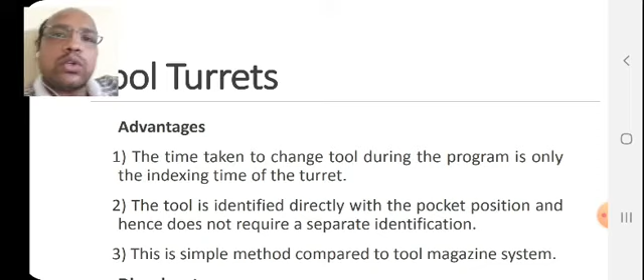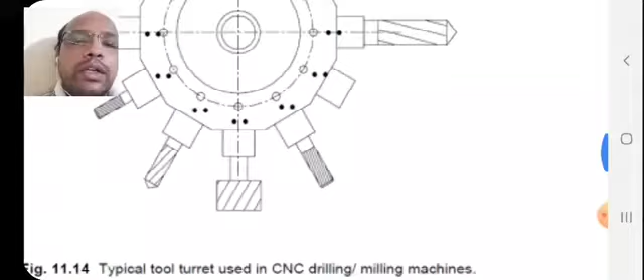Suppose the turret is rotated by 30 degrees. You can see this diagram once again. Suppose in this diagram, from this tool you want to shift to this tool, so there is approximately an angle of 30 degrees. So for 30 degree rotation of the tool turret, you need some time. That time is called indexing time.

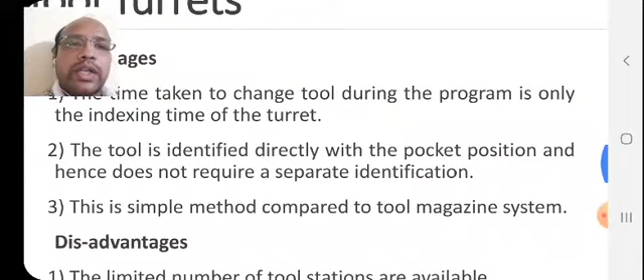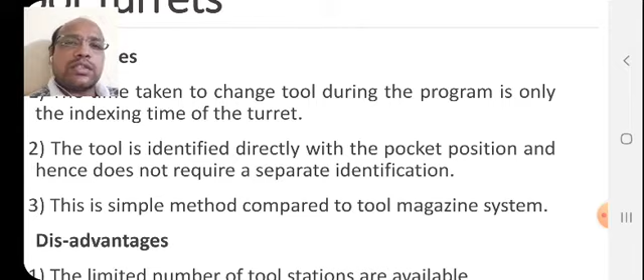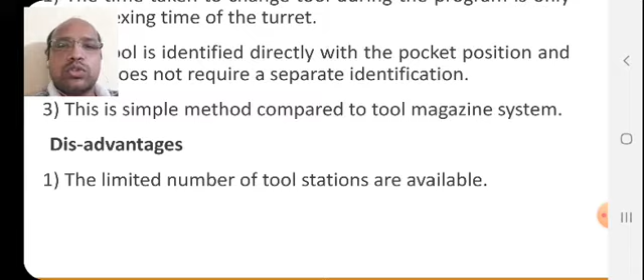Now let us see the next advantage. Tool is identified directly with the pocket position, and hence it does not require separate identification. Or you can say simply we have defined the tool number in the part program, so you don't need to identify the tool itself. This is a simple method compared to tool magazine system. Tool magazine system consists of a large number of tools, but tool turret consists of a minimum number of tools. Disadvantage is that only a limited number of tool stations are available in tool turrets.

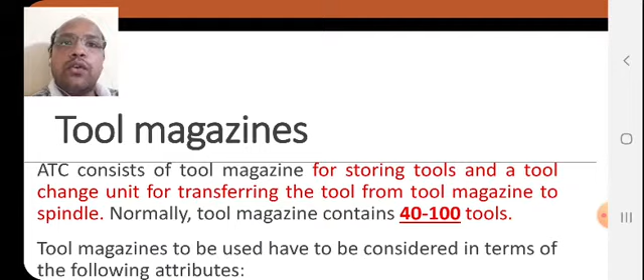Now let us see what is a tool magazine. Automatic tool changer (ATC) consists of a tool magazine for storing tools and a tool change unit for transferring a tool from the tool magazine to the spindle. So we have to transfer the tool from the tool magazine to the spindle. In this way, the tool change procedure will happen. Normally, a tool magazine consists of 40 to 100 tools, so a large capacity is there to hold the tools.

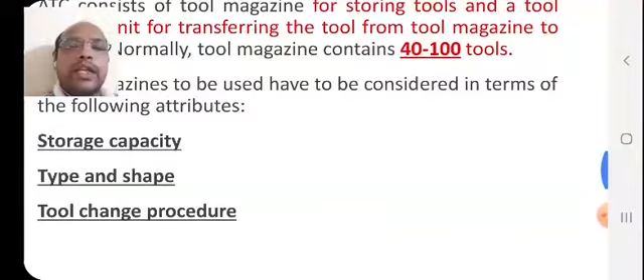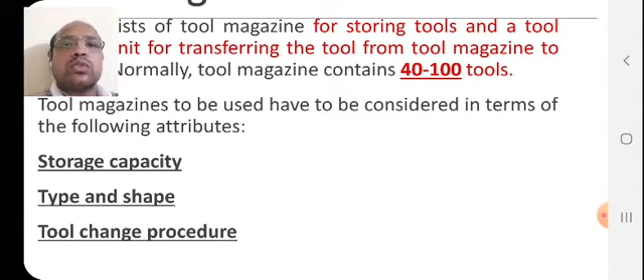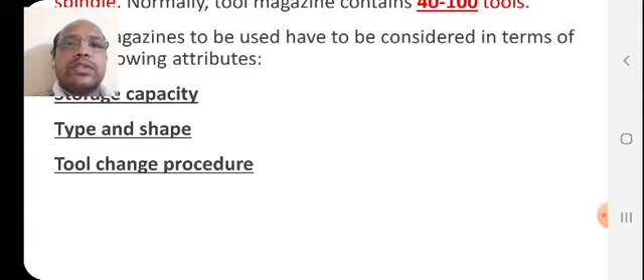Tool magazines to be used have to be considered in terms of the following attributes: storage capacity of the tool magazine, type and shape of the tool magazine, and tool change procedure of the tool magazine. These three parameters are important to consider the tool magazine quality or features: storage capacity, type and shape, and tool change procedure.

Now, the advantage of a tool magazine is that a tool subjected to excessive wear can be duplicated, so that when a tool has reached the end of its life, another tool is ready for operation. This is a great advantage of the tool magazine. Once tool life is about to be over, you can shift to the next tool immediately.

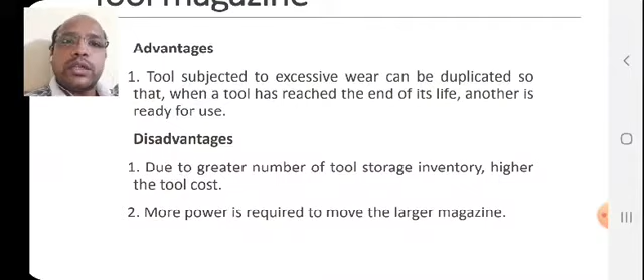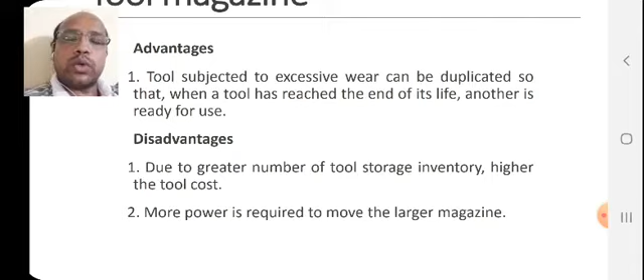Disadvantage is that due to a greater number of tools stored, there is obviously higher tool cost. More power is required to move the larger magazine. If there are 100 tools stored in the tool magazine, you require more power and torque to move the complete tool magazine. Suppose you want to change a single tool, you need to move the remaining 99 tools so that you can insert the one tool in the tool holder. So for changing even one tool, you have to move the complete tool storage in the tool magazine, hence you require more power.

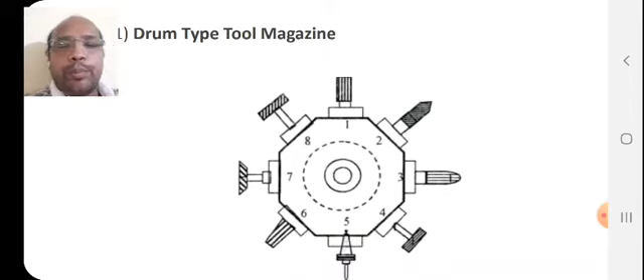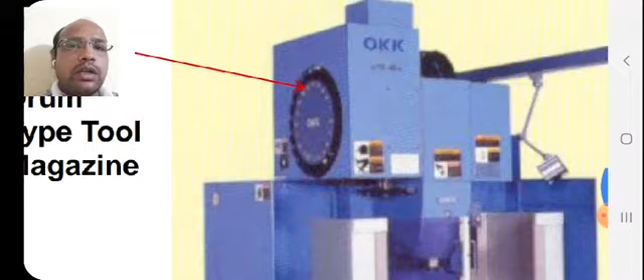Types of tool magazines: this is one type, the drum type tool magazine. You can see this picture, it consists of 8 tools which are mounted in a drum type tool magazine. So drum type tool magazine, you can simply call it a turret type tool magazine. It has a limited capacity to store tools, and its function is just like a turret tool holder. You can see the actual picture of a drum type tool magazine on this machine here.

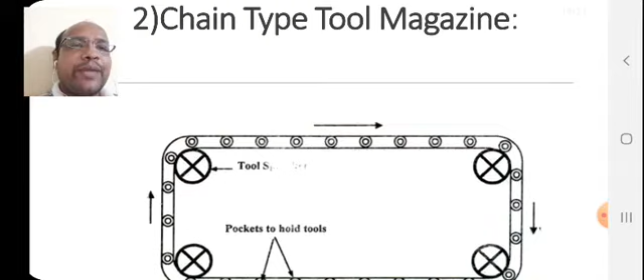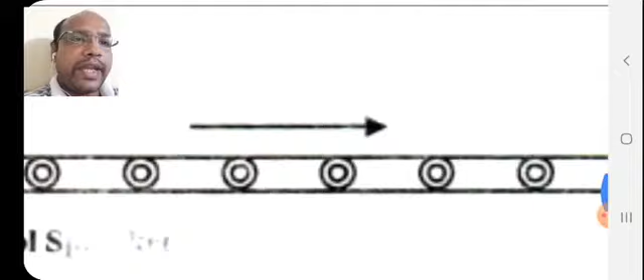Now the chain type tool magazine, you can see here, it is mostly used in large capacity CNC machines. These slots are provided for holding the tools, and this chain is moving in the direction of the arrow as shown in the figure. These are the rollers, or you can call them sprockets. Just like in a bicycle we use sprockets to move the chain, in the same way these sprockets are used to move the tools.

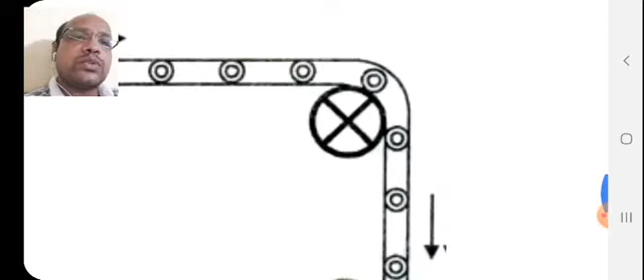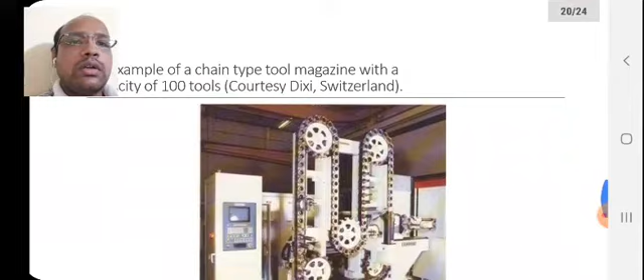So the chain type tool magazine obviously has more capacity to hold a greater number of tools compared to the drum type tool magazine or turret type tool holder. You can see the actual picture of a chain type tool magazine. Here you can see the tools held in this chain type of magazine, and these are the sprockets.